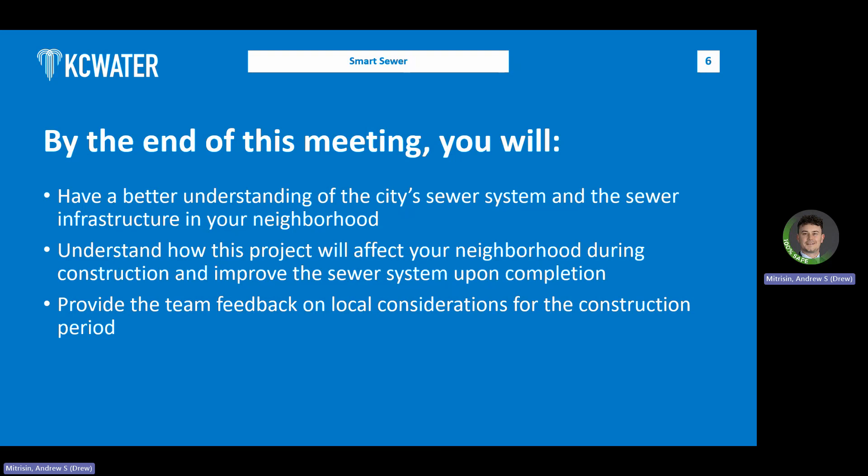What we hope you'll get out of this meeting is a good understanding of how the sewer network works in your neighborhood, in your community up here, and how your neighborhood will be affected during the construction phase of the project. And we do want to hear from you if you have specific things happening at your property that you want our team to take a closer look at. We'd love to hear about that. So with that, I'm going to have John Pruce come up and talk a little bit about the whole Smart Sewer program and how this project fits in.

Thanks, Drew. So how many of you have heard what the Smart Sewer program is or seen any information about it? It's a federal consent decree that the city has to reduce the amount of overflows that come out of the sewer systems that contaminate the local streams and rivers.

And in your area, you have separate sewers, meaning you have a separate sanitary sewer and a separate stormwater sewer. In the older parts of town, in essence, from the Missouri River all the way south to 85th Street, and from State Line over to the Blue River, those are called combined sewers. And in those areas, there's one pipe that carries both stormwater and sanitary flows.

So you're in a newer part of town, so you have separate systems, which is a good thing, but nonetheless, the EPA doesn't want us to have overflows out of the sanitary sewer system, and they are occurring. So one of the ways that we try to reduce those is by removing the amount of rainwater that gets in. And how does it get in to begin with? Is through leaks and cracks in the pipe, and I'll show more about that in a moment.

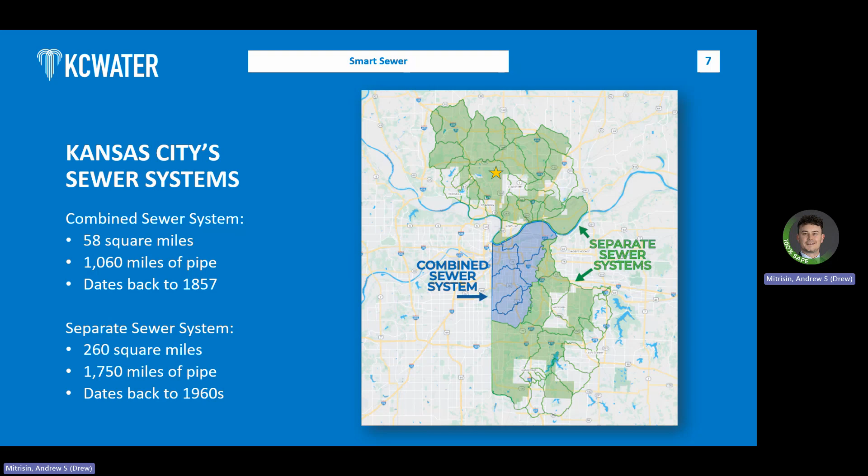So this is just a map showing that combined sewer area in blue. Believe it or not, there's an area downtown by the downtown airport that's also separate. And everything else further to the north, as well as everything south of 85th Street, is all separate. So in the separate sewer system, I mentioned there's two separate pipes. That's what you have here, but yet we still have rainwater getting in and overloading the pipe.

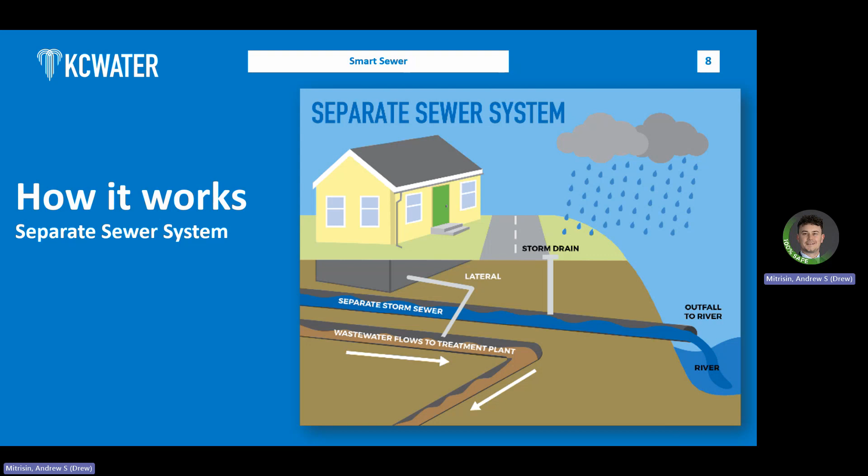And so some of those sources of inflow and infiltration getting in can be where there might actually be a pipe that's interconnecting the storm sewer system with the sanitary sewer system. Adds a lot of rainwater, which we don't want. Also, tree roots tend to get into the joints of pipes, and then they swell the joints and allow rainwater to get in or groundwater to get in.

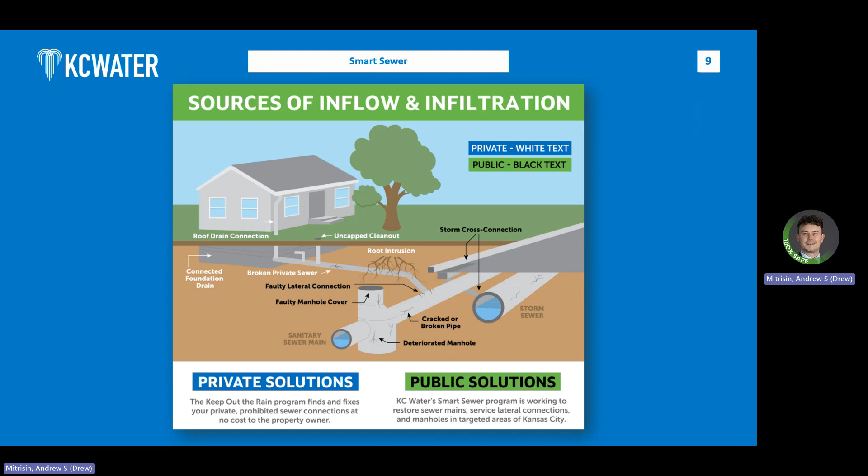There's also area drains and other private sources on private property where downspouts, for example, can be discharged directly into a sanitary sewer. Even though it's against the plumbing code, it may have been hooked up that way, in which case we come along and try to disconnect those. So we're doing both public and private inflow reduction, trying to reduce the amount of rainwater getting in. And this project specifically is on the public sewer side, but we are also doing work on the private side, which you may have heard about already.

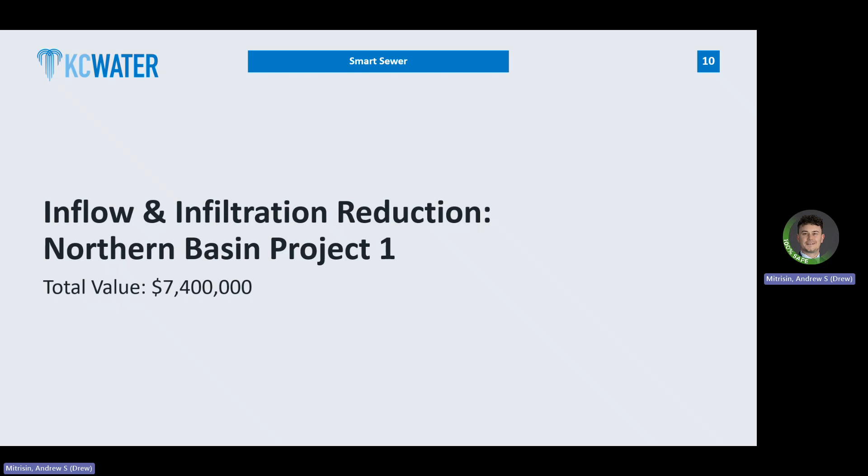So let's talk specifically about this project. We're thinking the value of the construction, 7.4 million all in with design and construction. Drew, what's your bid price that we got on the construction? Just construction, 7.4. Okay, and GBA is the design engineer who did the design documents as well. And right up here by Weatherby Lake, as you know, and the project boundaries are basically south of Northwest Barry Road all the way down to Missouri State Route 9 and west of I-29 and east of Mace.

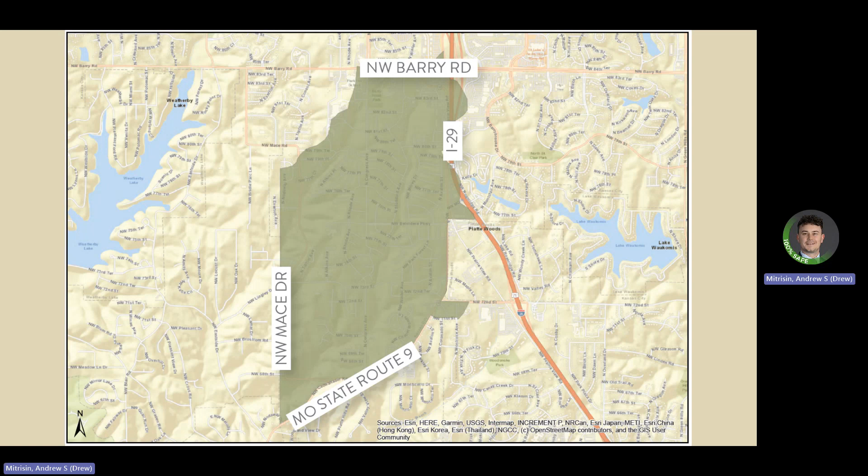So we're planning on doing a lot of rehabilitation in this project, and the work that's going to be performed here begins with a lot of rehabilitation replacement of piping. And George is going to come up and talk to you about what's all involved. George's history has been a lot on sewer rehabilitation. Guy in the field that has seen a lot of rehabilitation being done.

Yeah, thanks. Again, my name is George Downs. I'm with Burns & McDonnell. I'm the field operations manager. And basically, if you have any issues during construction, we would like for you to contact me first. And then I will try to get answers to your questions or try to resolve any issues you may have.

But when you call me, I'm not in the field every day with the crews. So when you call me, I'm going to answer the phone, take all your information, and I will track down the answer or try to get something resolved, but I will not be able to do it right then and there. So you're just going to have to give me a little bit of time.

So when we talk about the construction for this I&I project, we're talking about two main types of construction, trenchless technology, and there are some open cut repairs that need to be done. The trenchless technology is CIPP, which is basically installing a new pipe within the old pipe. We don't dig anything up, but they do access each manhole. We also will do CIPP service line connections. Again, we access that from the manholes. We don't have to dig anything up.

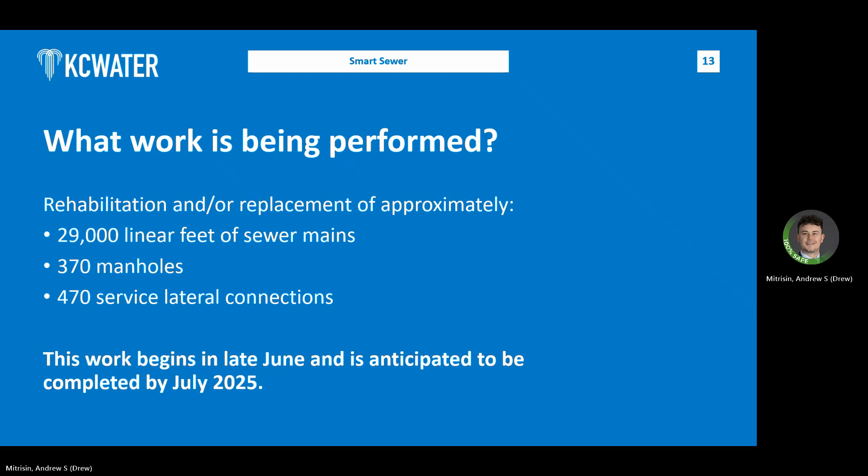They do make a lot of noise. They do have to line up on the manholes in a certain way, so sometimes they're blocking part of the road when they're setting up. But it is noisy because they run generators and boilers and things like that, so you will hear noise when they're actually doing that work.

The crews that do the service lateral repairs, it's smaller scale, but again, they run generators and equipment to be able to put those service lateral liners in. The open cut construction is a different story. You will see big backhoes, depending upon the size and depth of the pipe that they're working on.

But you will see large backhoes, skid loaders, dump trucks, and they will be working in that area, and they will create dust in some places, but we will always try to make sure that we are cleaning that up at the end of each workday so that you're not having to drive through that.

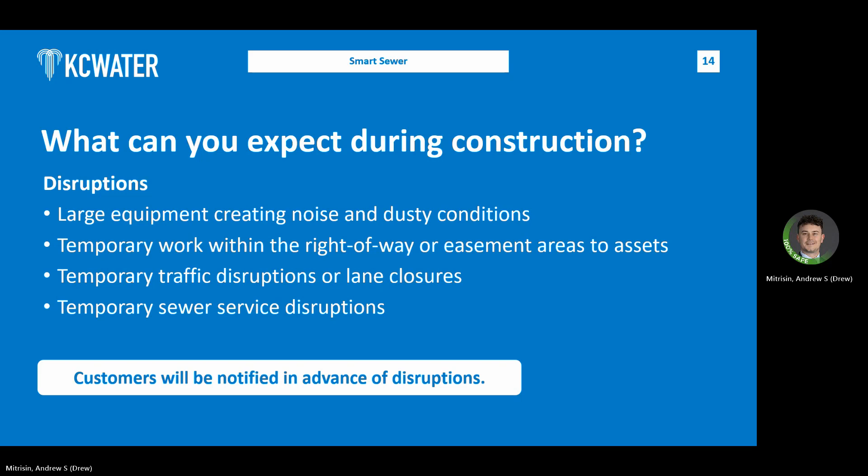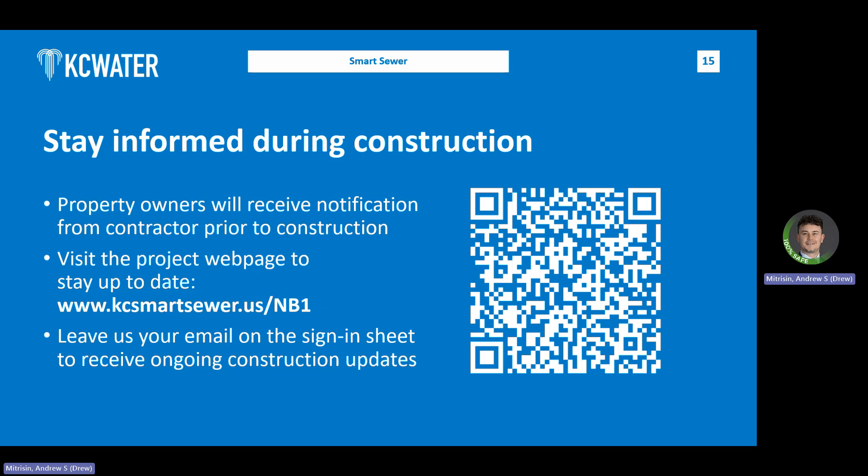And if you leave us your email address on the sign-in sheet, we can make sure that you're on the email list to get those updates every time they send a new one out. So are there any quick questions for me on this? There will be questions at the end, but I'm gonna leave this up to Eric to talk about schedule now. This is Eric.

So I'm Eric McCormick, project manager for Havens Construction. So if you do have any construction, I know Doug said you go through him, but you can also call me anytime. My information will be on there as well if you have some specific questions about your property.

So right here, one thing I wanted to add: we did mention that we're going to be replacing lines from manhole to manhole, and technically they're scheduled for open cut operations. We will actually handle that via pipe bursting, so we will not dig the entire line up. Basically what we'll do is dig a pit at the start, right outside the manhole, and at the end, right outside the manhole. And then we'll dig up where those service laterals will connect to the pipe, but everything else will be left

underground. How that works is we take a new pipe and pull it through the old pipe, and it bursts the old pipe as the new pipe comes in. Once that's done, we'll reestablish the connections for the laterals and to the main. So just a little clarification. Just make sure you tell them those service laterals have to be dug up to make those connections. That's what I said. We'll dig up the service laterals and the start and end pit, basically your pull drag pits. And then once it's pulled through, we'll make those connections and backfill everything.

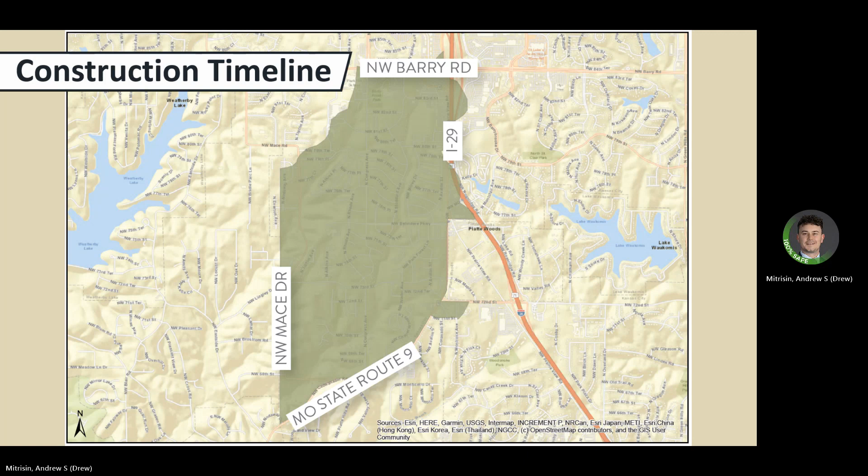So let's get into, it sounds like we want to get into questions. Does that sound accurate? So here, scoot over.

The main point before we get into questions is your first point of contact is George Downs. And before you leave tonight, please take a picture of that, grab a fact sheet with his contact information on it. If you can't reach George, then Bogue is your second point of contact. And then Eric is also one of your options. So we'll try to get your questions answered, and we're trying to give you options, but the priority is George Downs.

So with that, let's take some general questions about the program and the project. And then if you have specific questions about your property, I invite you to come forward to one of the drawings, grab a project team member, and we will talk to you about your specific property. So with that, are there any large questions about this project? Yes, ma'am. It's a water main. So this won't be simple.